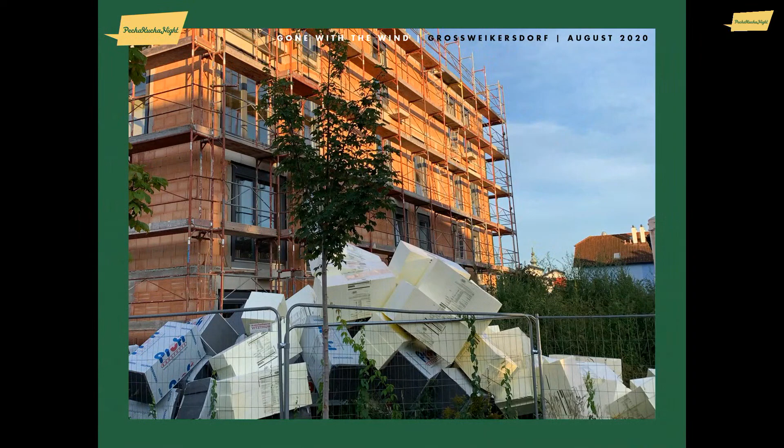But on the other hand, we fell in love with bricks, because bricks are not only a fantastic material, but they have this sensual quality. And therefore we tried to develop buildings like the Oberrad project here in Frankfurt, where we use bricks in a monolithic construction, filled with insulation, so that we don't have to add insulation to the outside walls.

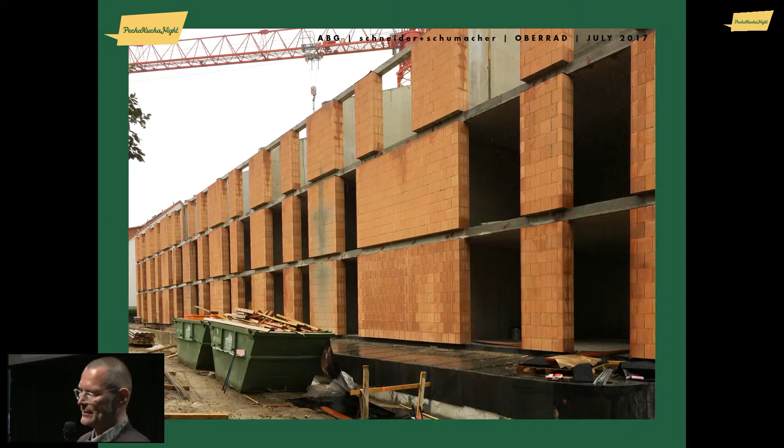The Oberrad project was developed for limited rent at 10 euros per square meter. It was not a monolithic brick construction in the beginning, because you see concrete slabs, and we also have partition walls in concrete. But we started to build facades in the brick module with perlite-filled bricks.

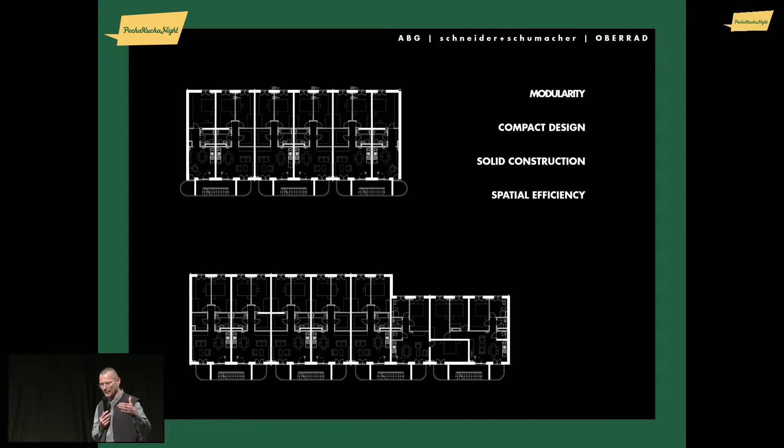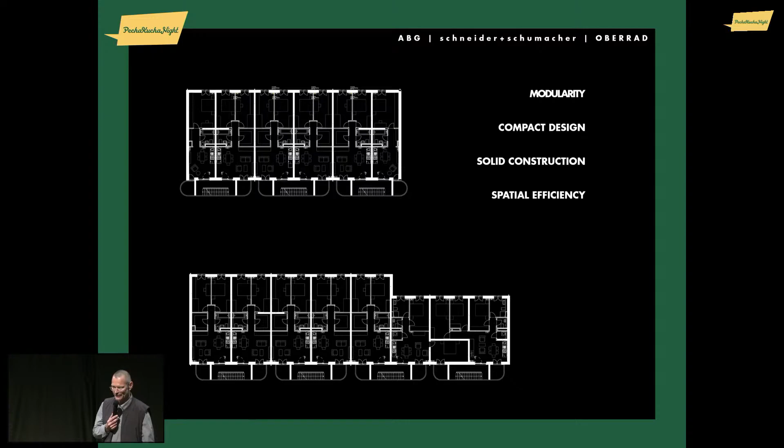What you can see here is, as I mentioned, the staircases are put outside the heated building envelope. So we have less heating energy needed for the inside, and we can save this space for the flat typology, which is a modular typology we also developed further for our next project.

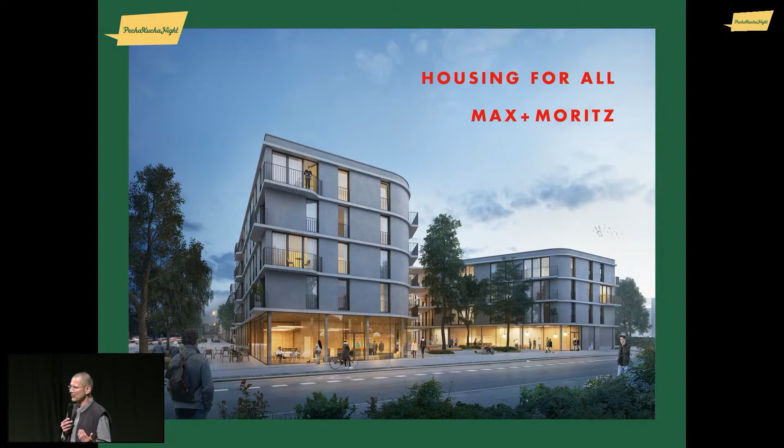This project, called Max and Moritz, after Wilhelm Busch, by Schneider and Schumacher, was entered in the Housing for All competition, where after the first phase, where we applied with the Viennese project, we were given a site at Hilgenfeld, close to Frankfurter Berg, where you can see the Nidda, and where the circle is, there is our site. A kind of bigger extension of an existing structure, and the 10 teams selected in the competition for phase 2 got 4 plots, and we took 2 of them.

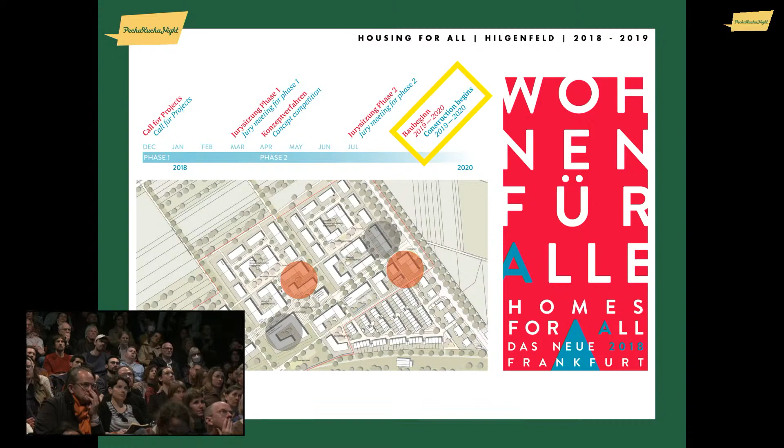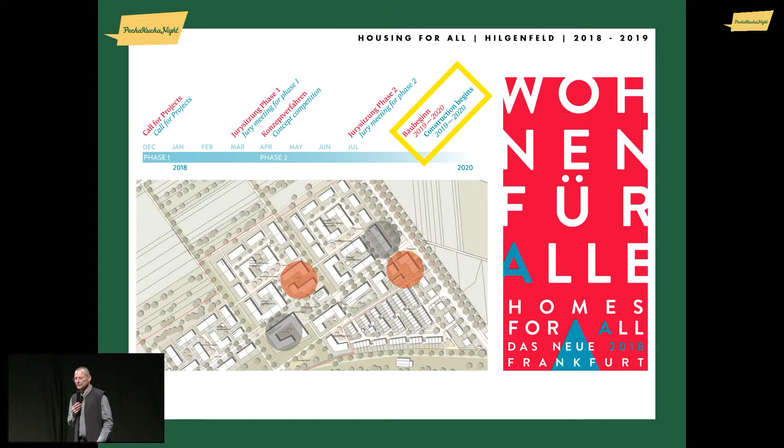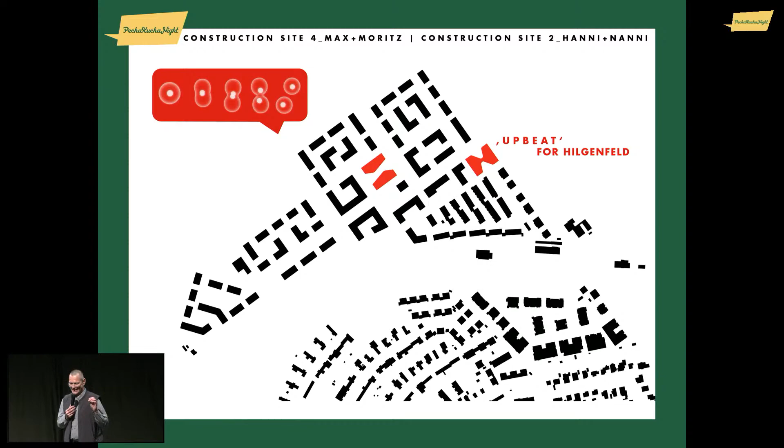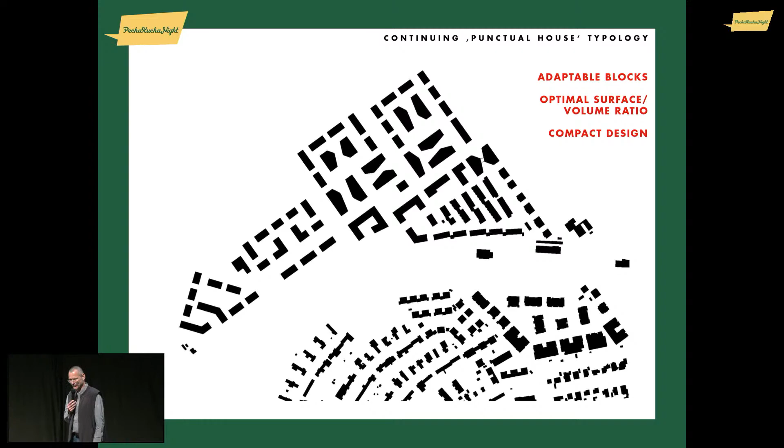As you can see, we were kind of interested in cell division - you see Max and Moritz on the right and Hanni and Nanni on the left. We also found that there are many urban structures in Germany which are only bars, and we fell in love with butterflies. So we thought we could also transform these city structures to get a bit more interesting inside spaces.

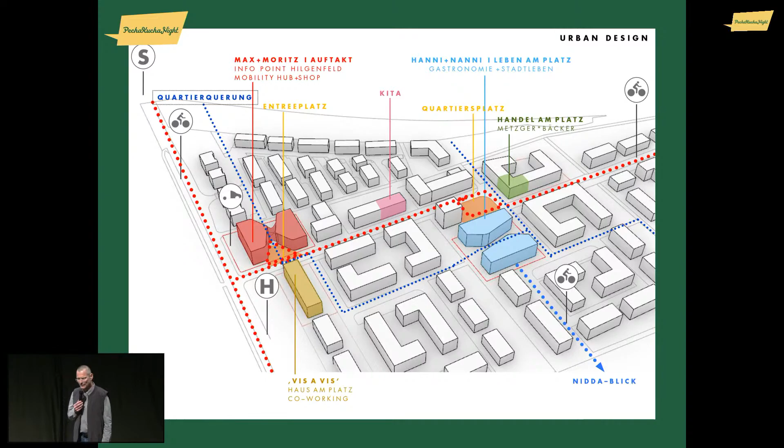As you can see here, the urban design of Hilgenfeld, on the left-hand side, Max and Moritz as the upbeat, and then entering the whole city quarter, and developing the scheme in blue, Hanni and Nanni, which was not selected.

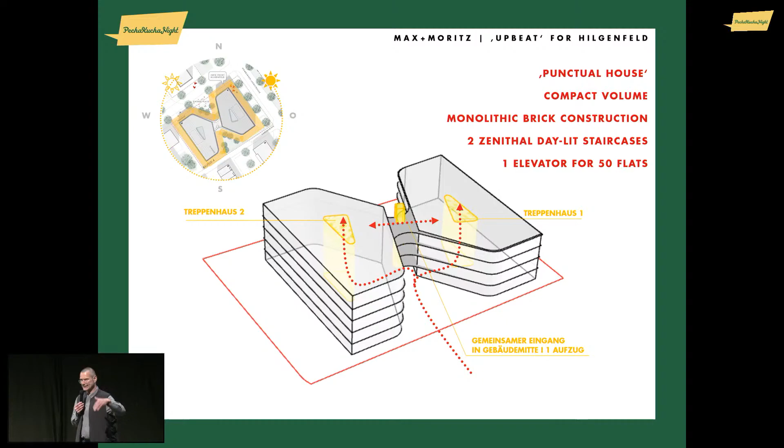But our proposal showed a kind of core or punctual house with a very compact building volume as a monolithic brick construction, as I already mentioned. We have 2 staircases which are lit from the sky, and 1 elevator in the middle, serving 50 flats.

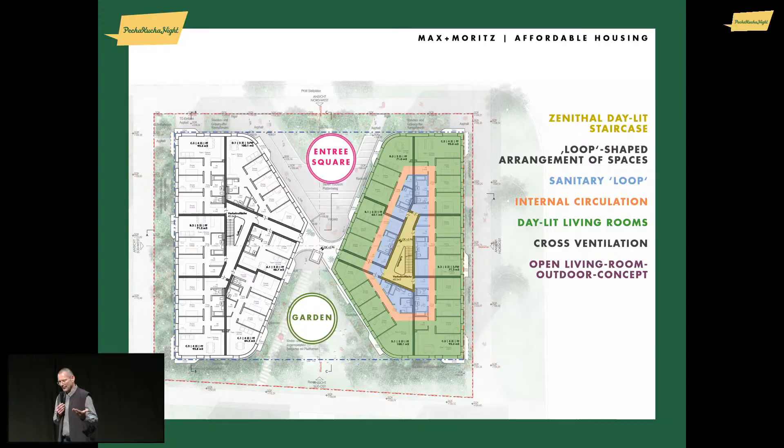This is something we often do, we try to get as many apartments as possible to a lift, and we kind of overcome this regulation.

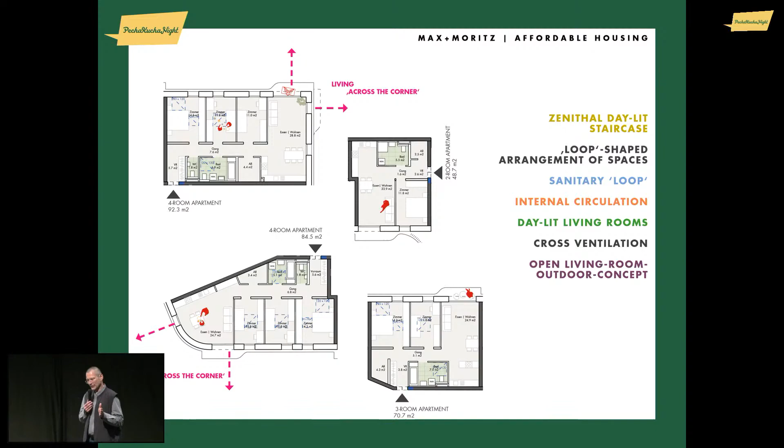That only 4 flats per staircase are enough. You can see the building structure, which is circular, and we have very compact flats, so you see the outside brick walls. 2/3 of the flats are orientated to corners or opened around corners, so cross ventilation is possible. And it's a very rigid module, in order also to save building costs.

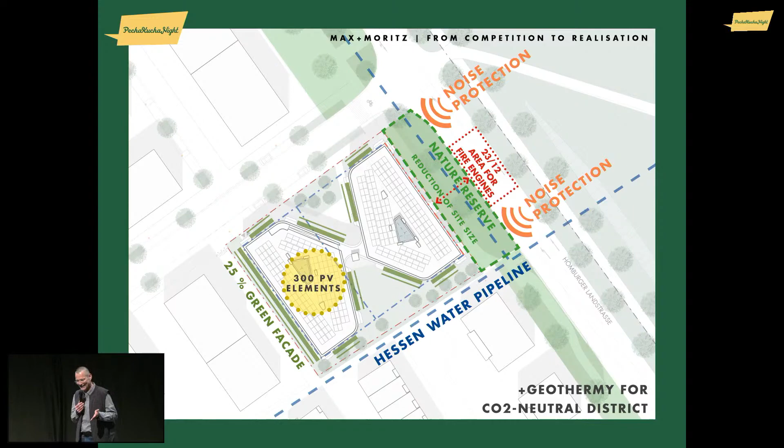Then we went into the process from the competition to realization, where the building got the Eierlegende Wollmilchsau treatment. We had to house 300 photovoltaic elements, we had to do 25% green facade. We found that the site was limited by Hessen Water and the natural reserve area, and we are still fighting with regulations dealing with noise protection.

It may be a good idea to reduce the speed limits at this road in order to get rid of this noise problem. Maybe this will be a way in the future.

It's almost 4 years ago since we won. Ernst May did 12,000 flats in 5 years, and we hope that we can build 50 flats in 12 years - it's a joke, but there is hope. We will enter the building application maybe next April, so 5 years after we won the competition.

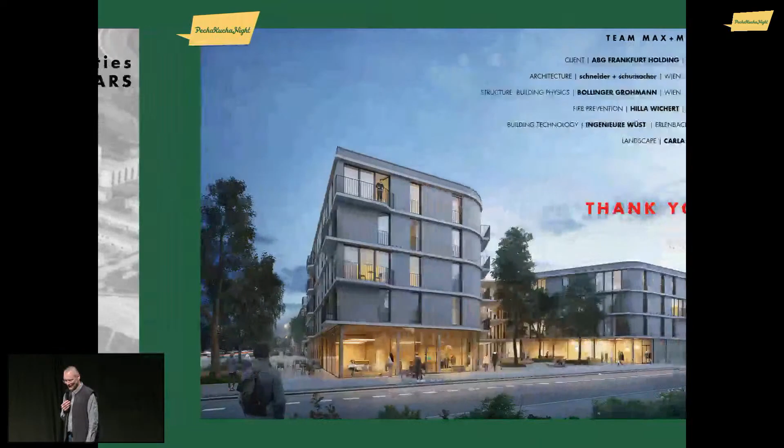I want to thank you for your attention. This is our lovely team, consisting of Bollinger and Grohmann, Hilla Wichert, Wüst Engineers, and Carla Loh for the landscape. Thank you.

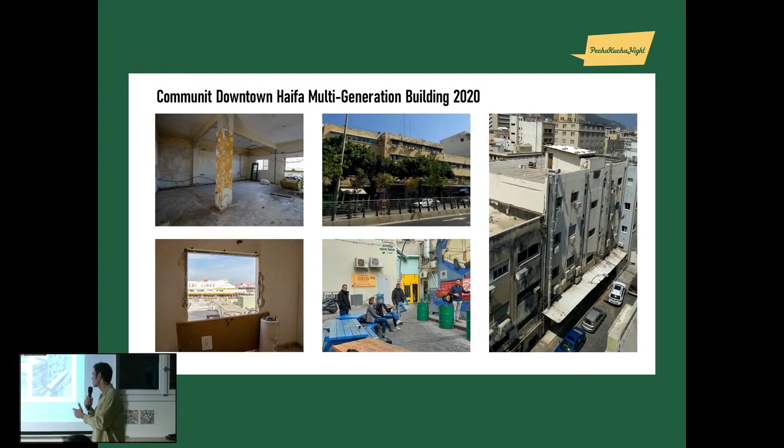We already knew the DNA, we know how to do it. We work together with our neighbors, with our future tenants, and what we're doing there is a multi-generational building, combining both young and old tenants, integrated with common spaces and areas.

This building is being built these days in downtown Haifa, going up the Carmel mountain, in Hadar Carmel. The Hadarim Fund, a social impact fund, is renovating 4 buildings in the neighborhood.

They're using the SDG, the UN measurement index for sustainable development, and creating a multi-sectoral combination to create safer streets, affordable housing, and promoting social businesses to improve security there.

Again, to the next level, we are now involved in dozens of neighborhoods around Israel. In all of those neighborhoods, we are part of the urban team as social urbanists. We combine big data with social work in order to make more neighborhoods more affordable.

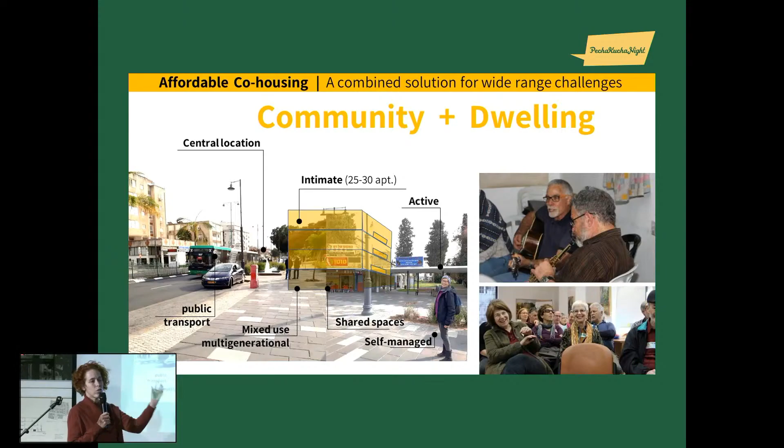So what we've been starting to look into are models that are very similar to what Shai and Eitan just showed us, that connect dwelling and community. In that way, we're trying to give our elders solutions for many of their problems.

And what we can see is the big benefits of these kinds of co-housing initiatives, where they have shared spaces and equipment, where we have a lot of social interaction at home. Just think about these people that at 65 or 70 stop working, and suddenly, after being always surrounded by people, they're not. So we want them to be surrounded by people at home.

Why is it not happening in Israel? Because the land is very expensive, and also, even though we are the land of the kibbutzim, the model of social housing was abandoned, and we're almost entirely market rate and market initiated.

And if that's not enough, it's a very big challenge, a planning challenge, not only an economical challenge, but also a planning challenge to connect community and housing together. These are processes that work at different paces, different disciplines, and how do we make these things connect?

So we started to create a strategic plan for this, trying to think of how to overcome all the challenges. And we decided to start gradually from the easier side, which is market rate, working with developers on how to create housing that has these community spaces.

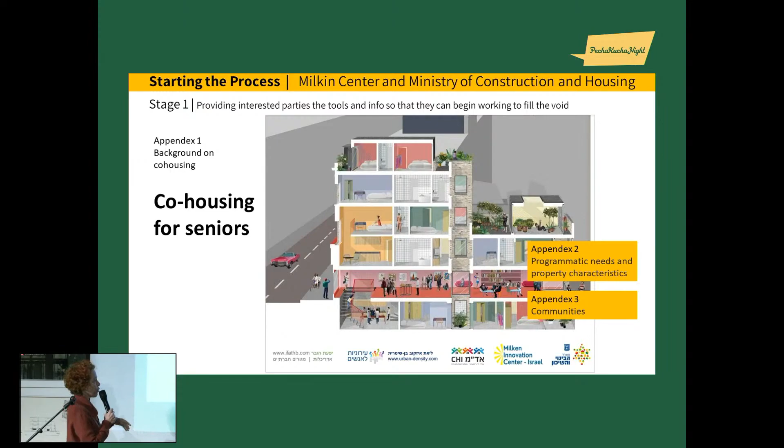With the Ministry of Construction and Housing and the Milken Center, just before Passover, a couple of weeks ago, we put out a request for sites that could house this. It was sent out to developers and to municipalities, and we outlined to them what this kind of housing is, because it's a new phenomenon here. Very few people do it, and the key to it is the shared spaces.

So we have explanations of what it is that we're requiring, and we're inviting developers and municipalities to suggest appropriate sites, where the key is actually thinking about what we can take out of our private house and share together with the community, in order to be more efficient, but also to create social engagement. Just by going to do your laundry, you have to step out of your house. Maybe on the ground floor you'll meet your neighbors, and that'll create the kind of social interaction we're looking for.

The unique requirements for our elderly are very interesting. When we look at the common rooms, we're looking at accessibility, because as they age they need, for instance, bathrooms very close by, and they need to be accessible. We're also looking for rooms that can be used for multi-generational social interaction.

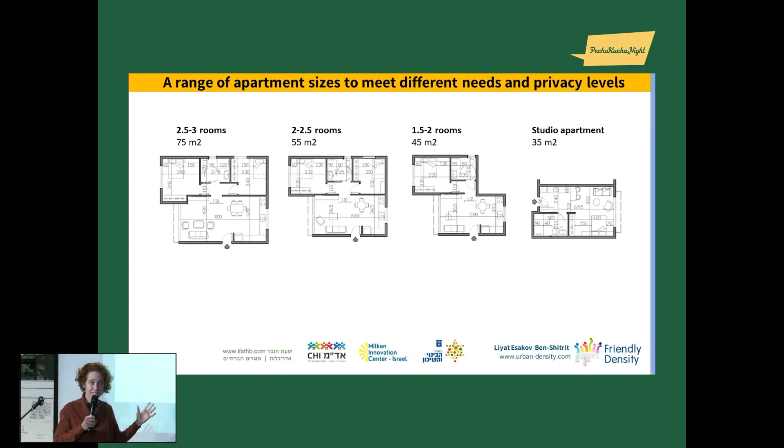We're also looking for various, very different apartment sizes. Unlike young people, older people have a history. They have families - in Israel we have big families, and we like to host them. So we're looking at different apartment sizes. We're also looking at tenure security - a person who moves into a home at age 65 or 70 definitely is not going to want to be kicked out at the age of 80 or 90. And we're looking for active kitchens, because, like I said, we like to host.

That's it. This was a challenge to speak so quickly. Thank you very much.

Thank you very much for this excellent reminder that we need different housing for different needs, and that we really need to develop further our requirements and regulations so that this kind of housing, which was just introduced to us, is easier to realize at an affordable price. Thank you for that.

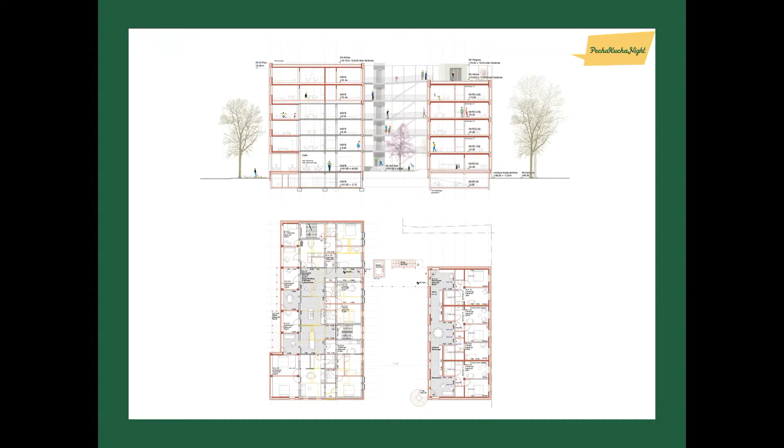We are a group of about 100 people, and we also work on this existing building and try to save as much as we can, but we also have to reconstruct one part to max out the amount of residents, because more residents means lower rent and also lower investment per person. So these are the kind of people, all experts in different fields, I would say, and we all share the passion to share resources and work on new ways of living together.

We work there together with mainLastenrad, because I think it's very important to even start being in the neighborhood, because we want to grow into the neighborhood instead of just being there when the building is finally finished. So we think a lot about what the people need in this block, and what we need if we all live together. There will be a wood workshop we want to offer to the public and share our knowledge, also a bicycle workshop, to interact with the neighborhood.

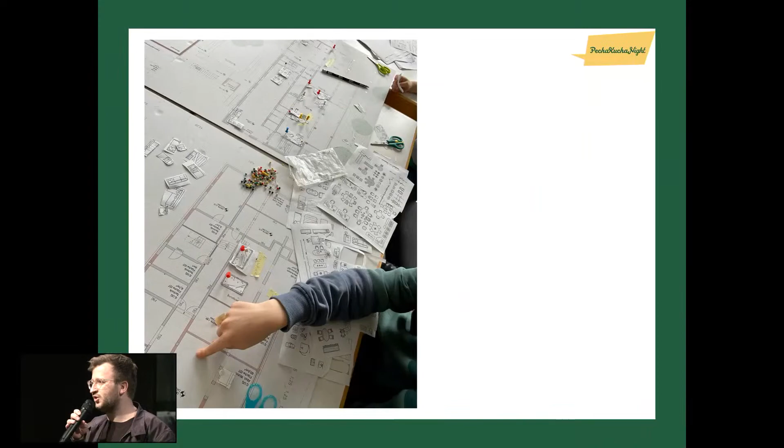We also understand ourselves as a housing lab, because we work on future affordability, and what we really want to do is work on the Frankfurter Cluster. This is an even more efficient cluster, because seeing how the prices are for building houses, we actually need to lower the total rent. That means we need more efficient floor plans, because reducing the square meter might be even more important than reducing the price per square meter.

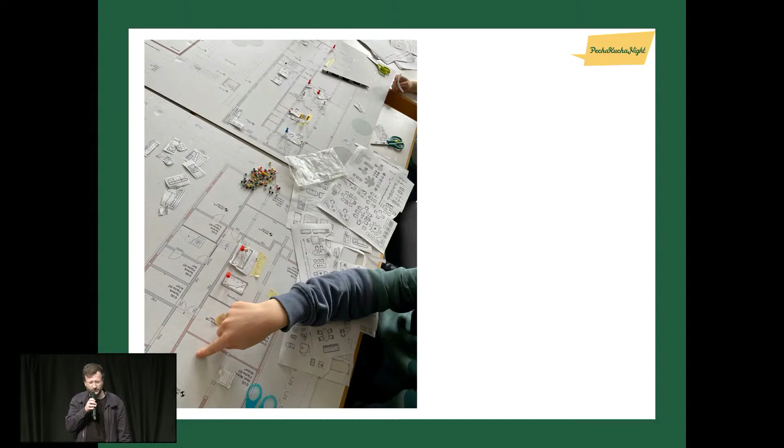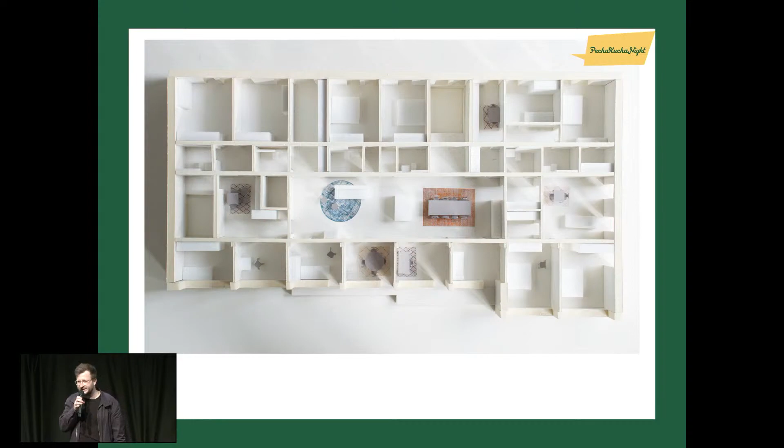I think there are already a lot of cluster housing concepts, like in south of Germany or even Austria and Vienna, and often the private apartments are still big enough so that even the community spaces are not used enough. So what we do is we try to push our limits in the private space and still have the bigger community space for this community housing project.

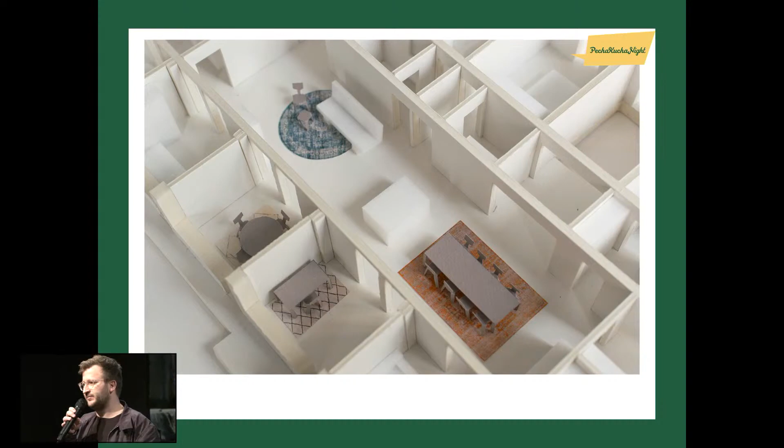And we know that someone needs to test things like that, especially if we want to rent out those flats, because there are things to organize, like how would those renting agreements look like.

I know the city of Frankfurt is already behind this change with the Baulandbeschluss, for example. They're already doing something in this direction, but right now no corporation can actually build beneath 18 euros per square meter. So we really need to lower the ground rent, the Erbpachtzins, because otherwise we stop here.

And there's also even more to do, because I think it's such a big challenge. We talk here all about affordable housing, and what we right now do is even try to build houses for our group. Especially when you think about existing buildings, it's very hard because, for example, there are things like the Liegenschaftsfonds of the county of Hesse, but they are only allowed to buy grounds and not houses. So how should we then work on affordable housing?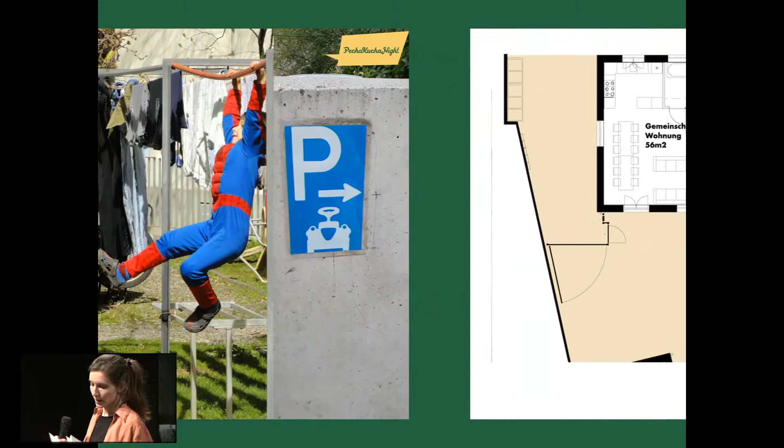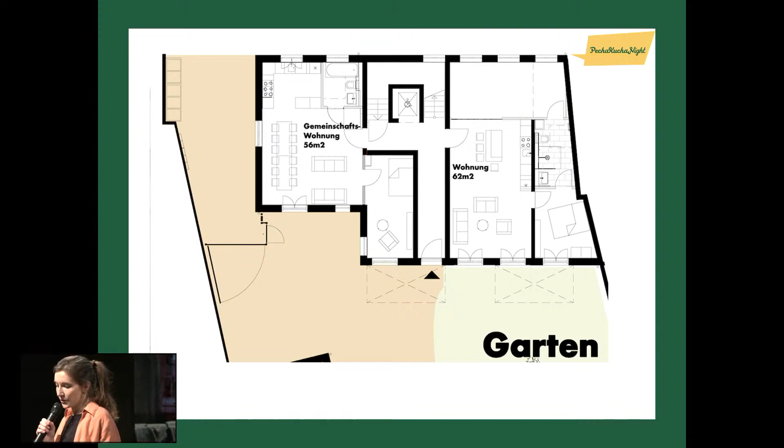So secondly, co-housing projects are often organized as cooperatives. So what is so great about cooperatives? Cooperatives secure stable rents in the long term. And with their attitude of solidarity and their democratic decisions, they offer solutions to the most diverse challenges of our time.

Space and therefore money can also be saved by sharing washing machines in a communal laundry room. 100 years ago, this was very common, at least among women. So co-housing projects brought back this beautiful old tradition, but with two differences: they are also used by men, and they call it something more elegant, laundrette, for example.

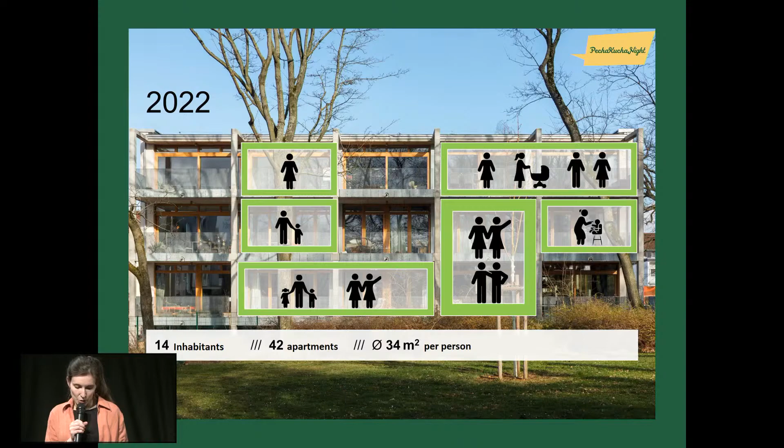And it's built to adapt to the change in their residential biographies. In 2038, their kids might have moved out, so the flats can be separated due to the modular construction. And the residents can stay in their familiar surroundings, and their space consumption is still kept very low.

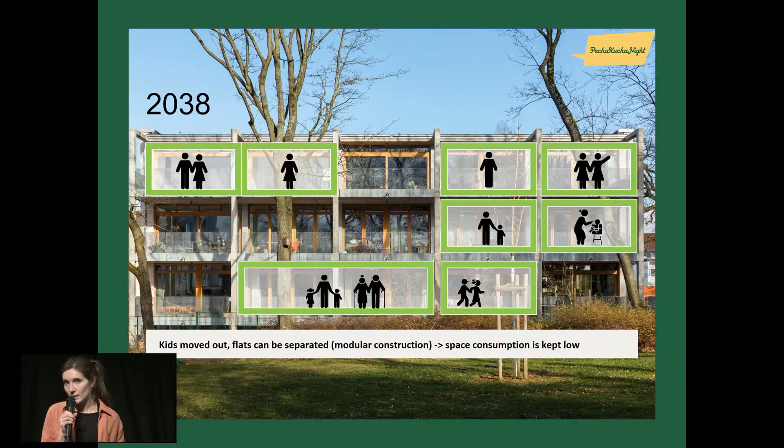I will slowly come to an end and share with you our vision. Firstly, we need more participation processes and multiple actors in housing, involving the society. Secondly, instruments such as concept awarding procedures in land allocation must become standard, rather than maximum price competitions.

Our team and many more people in Frankfurt and across Germany are working on that vision. We see ourselves as an intermediary organization between civic initiatives, politics, administration, and the housing industry. We invite you to visit the projects in Frankfurt on the 13th of May.

Thank you, Tabea. It was very inspiring. Now I would like to invite another Israeli speaker. Architect Daniel Zarhy graduated with honors from the Tel Aviv University School of Architecture. He has worked with OMA Rem Koolhaas in Rotterdam and Herzog & de Meuron in Basel. Zarhy has also been teaching at Bezalel Academy of Art and Design and Architecture in Jerusalem since 2012. He's going to speak on the design of two new communal housing projects currently planned in Israel. The architect will focus on the subject of empty spaces in his design and on the point of civic bottom-up engagement. So Studio PEZ is your office, and you're going to speak about communal housing projects in Israel. Daniel, please.

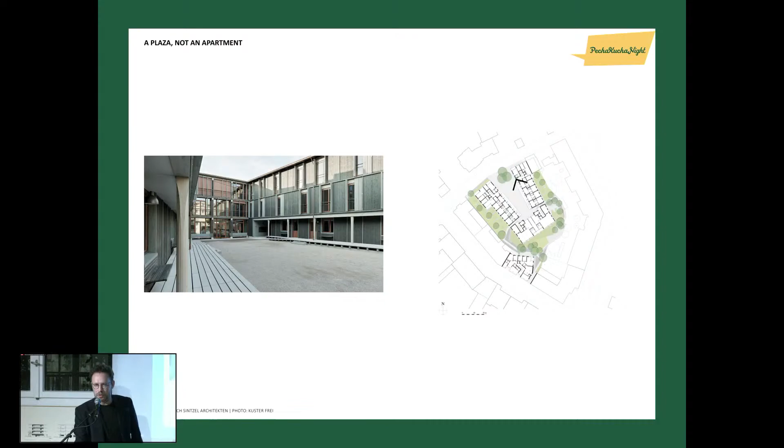Little did I know that at the same time in Basel, Switzerland, my business partner Pedro told his wife, his Spanish Cariña, vamos, and they had a similar opportunity in Basel when this nice Sintzel project just opened for public housing. Actually in both places, it wasn't only about the apartment, but it was more about the public space in the project, either the garden or this public space.

So when we speak about affordable housing, we usually miss the point. Why? Because we tend to speak about the minimum requirements for a flat, the minimum requirements for a room, the minimum rent. But we also should talk not about housing, but maybe we should talk about homes. So affordable housing is not only about real estate, not about square meters, or even how sustainable they are - all very important - but actually, they should include all of them, but much more.

So we believe that it's not only about reinventing the wheel, but rather rethinking each of the basic ingredients that construct a home. And I will demonstrate it in two projects in Israel and two projects in Basel, actually in Switzerland.

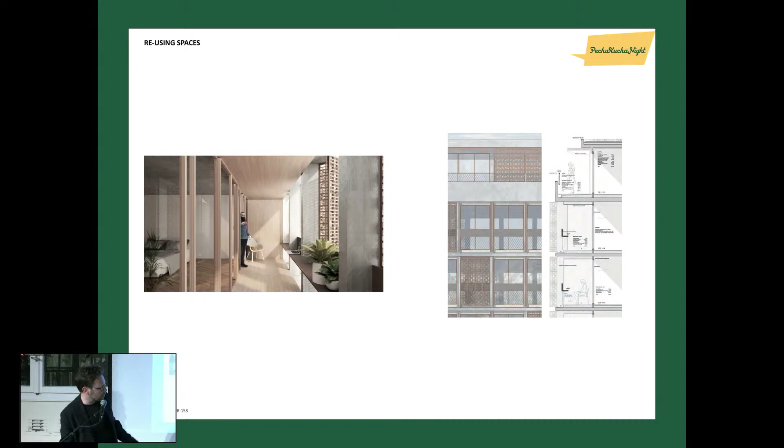So this is Hochbergerstraße in Basel. The project is about reuse of an existing office building in an industrial part of the city and turning it into affordable housing - the most sustainable way ever to reuse a building. And we looked for ways to use these steps to create new spaces, like open spaces for communication, for air, for meeting places.

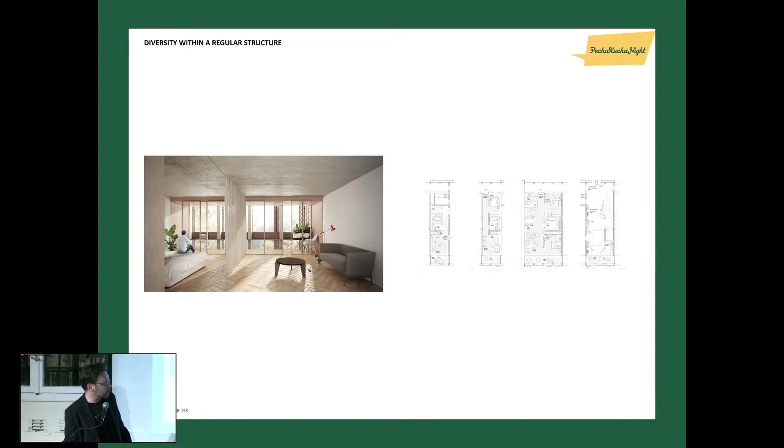As an office building, it has a regular structural grid, but we thought that encounters between people should have a diversity of apartments. So we created a variety of apartments that are able to host a variety of tenants. After inviting everyone in, we needed to design something extra - a social space on the building rooftop, so everybody could meet there, work together or alone, relax or work, flexible enough to choose your own activity. So we provide as architects a platform, and the people provide the content.

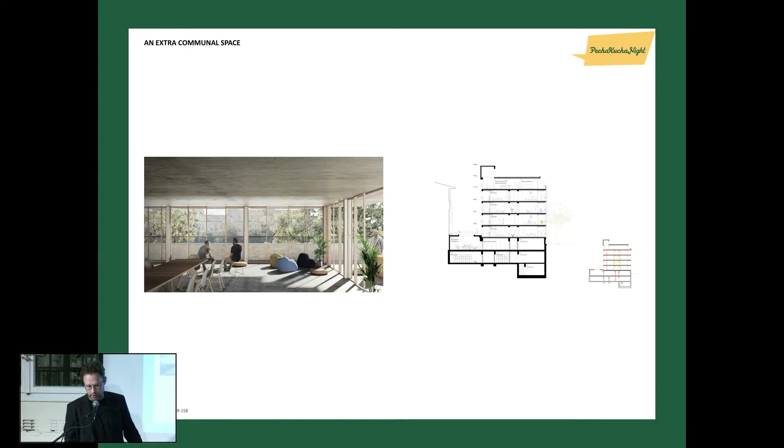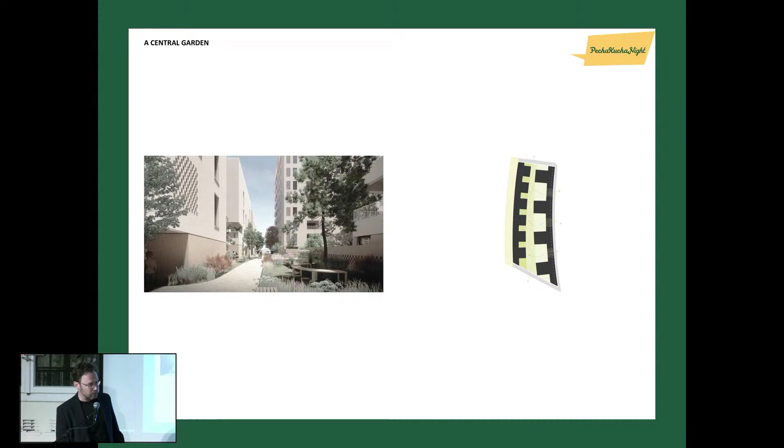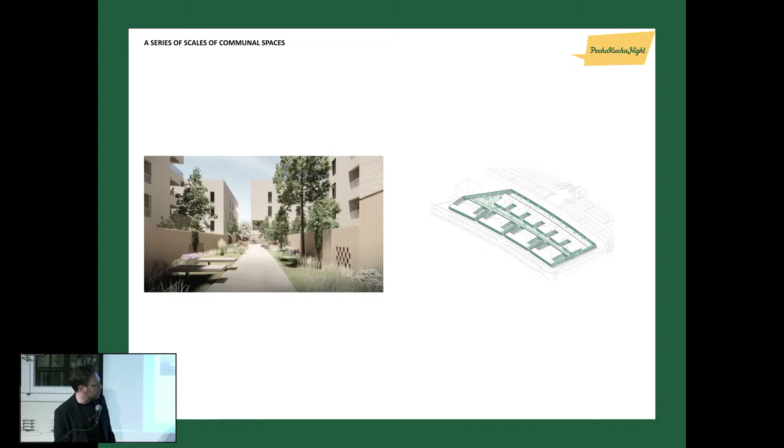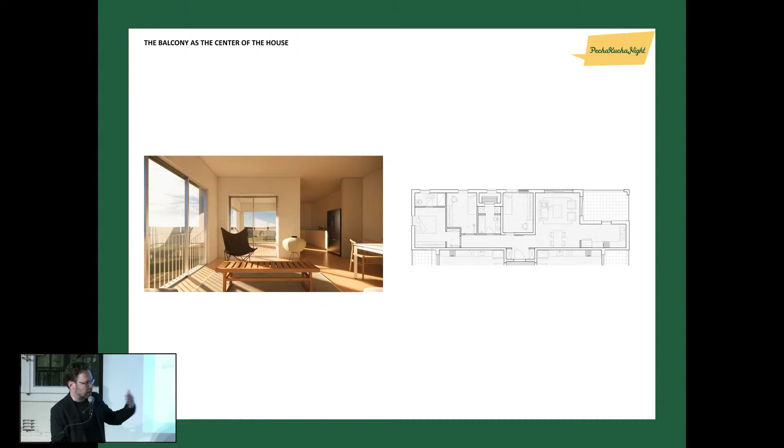As you know, we provide the scenery, but it's up to the people to provide the activities, the games, and the meeting places. So the next point, which might sound banal, is that by rethinking the balcony as a bite in the building's volume, it becomes the center of the house, a kind of Mediterranean patio that becomes the meeting place, a dining place, a living space for the family, where you can go from the kitchen or the living room, and where the whole family could meet.

We're going back to Switzerland, this time again in Basel. I like this project because it's actually intended for the least privileged people, for refugees. We wanted the tenants to be proud of their home, to feel that they are living in a luxurious palace. And the answer sometimes is very simple.

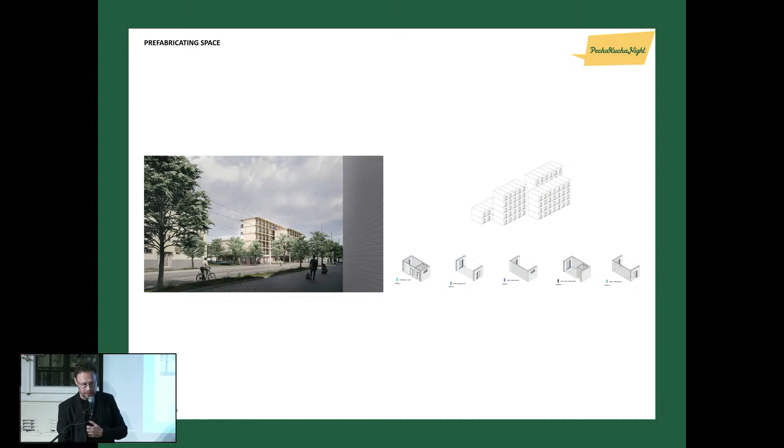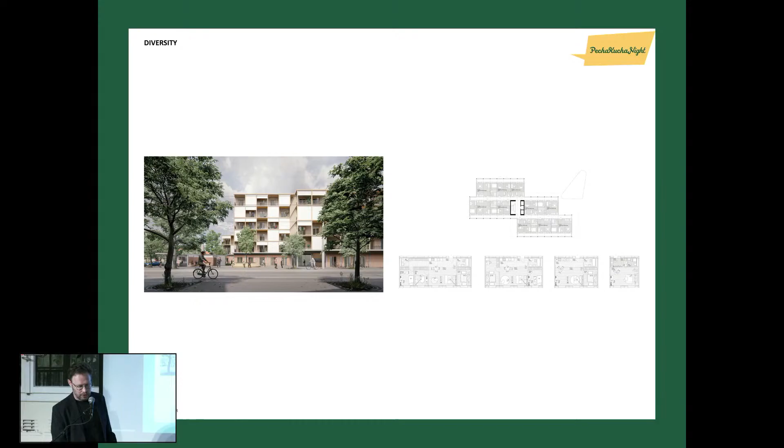So we used prefabricated timber construction that creates this kind of special silhouette. We stack the modules in a way that reacts both to the street, to the neighborhood, and also to the small cafe pavilion in an ex-tram station that was nearby. And despite this modular character of the building, we wanted to create...

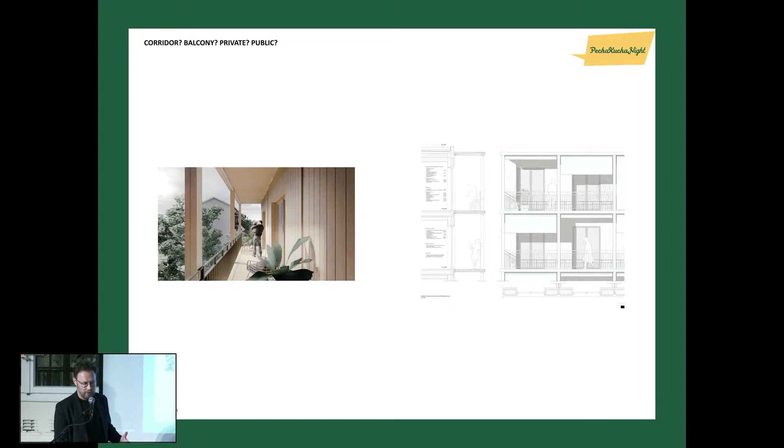The need for efficiency led us to create a kind of dual use for each of the spaces. So the access galleries for the apartments become a meeting place, they become a balcony, because every square meter counts, to make it as affordable as possible and to maximize the utility. We call it the Maxim house, which actually also means a charming house in Hebrew.

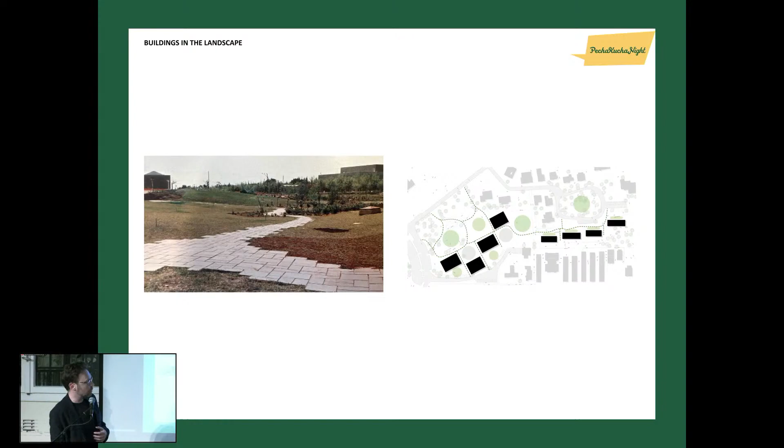Back to the Holy Land, it's a project we're designing. It's not so affordable actually, but in the Weizmann Institute of Science, where there is a striking landscape design from the 50s and 60s by Zur and Yahalom. We wanted to ask ourselves, how can we create a housing scheme that welcomes the landscape in, even in the apartments?

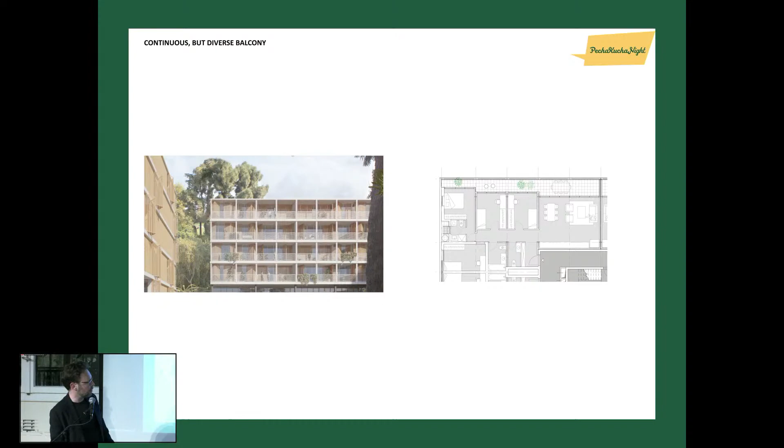So what we did is we created, each apartment is based on an elongated balcony with varying widths, each one according to the adjacent program, to the living space and eating space, to the rooms where you can have a cup of coffee overlooking the landscape, and also just to stand outside, catch a breath of fresh air, and look over the landscape.

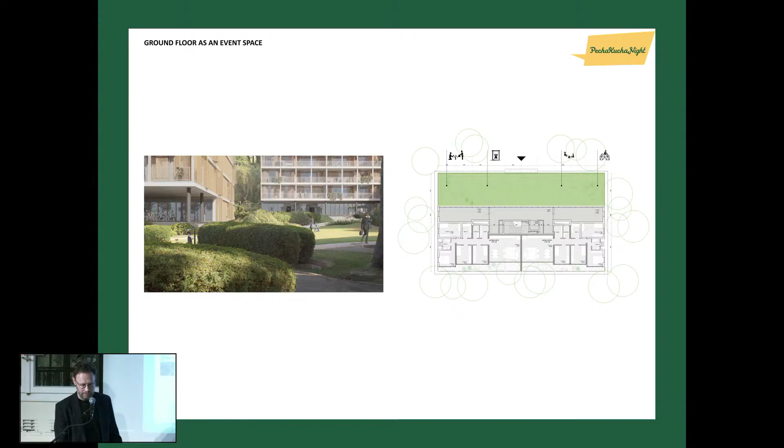But the main thing, again, is the community. By liberating the ground floor and leaving it half empty, we invite the community and the landscape in. It's a place where people can grow their vegetables, children can play, or scientists can talk about quantum physics or something like that. So how can we use architecture to take all those small ingredients, courtyard, balcony, bench, gravel, and create a wholesome building that is greater than the sum of its parts?

So we believe in architecture that is generous and open, a design that leaves room for interpretation. In other words, this is what defines an affordable home from a house: a room, both physical and metaphorical, for everyone to interpret in their own way. Thank you very much.

Daniel, thank you so much. It was exciting to hear that what we can do with such a simple idea of open space and height differences, and look at it from this scope, is really exciting.

So now I'm really honored to invite the last speaker from Israel, architect Omri Levy. I'm also very excited because Andrea and us here at the Living House and Ernst May Gesellschaft always thought that we want to make this event very multidisciplinary, not only hearing about a certain angle of the subject. Now we have the honor to hear students speaking through Omri Levy. He teaches in the Bezalel housing semester as part of the architectural education, focused on domestic spheres, promoting relevant debates on housing issues of equity, justice, climate change, existing culture, and possible alternatives. The research was done with students in the housing lab of the School of Architecture at the Bezalel Academy, looking for alternative ways to dwell in the near future, focusing on the challenges of density, climate change, loneliness, and urban responsibility. So I'm very excited to hear your voice now, Omri, and see you later.

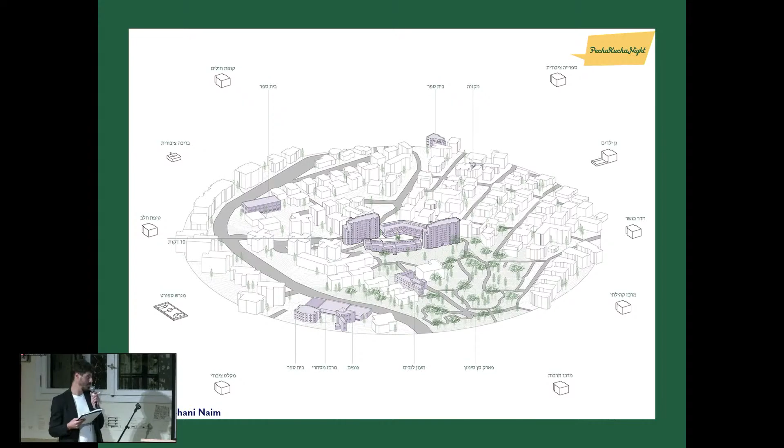The San Simon neighborhood is a domestic neighborhood, and we very quickly realized that it lacks a lot of amenities. There are a lot of units, but not so many functions that can help.

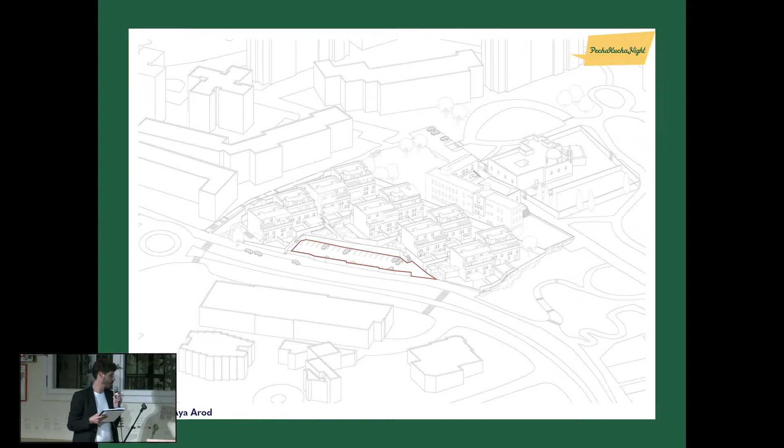It's very hard to see the lines, but practically, we assessed the site and tried to realize what are the qualities of different areas on site to understand where we can best intervene.

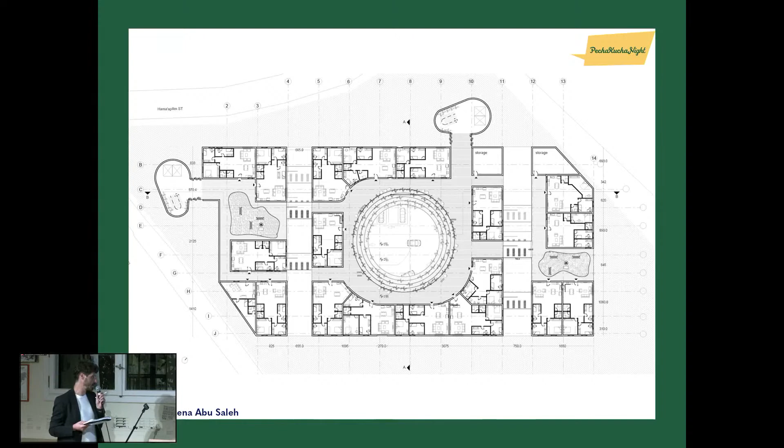I would like to quote Daniel Burnham and say that maybe we realize that we should make big plans, or at least we shouldn't be afraid of big plans. Big plans are great ways to reduce cost and to share facilities together.

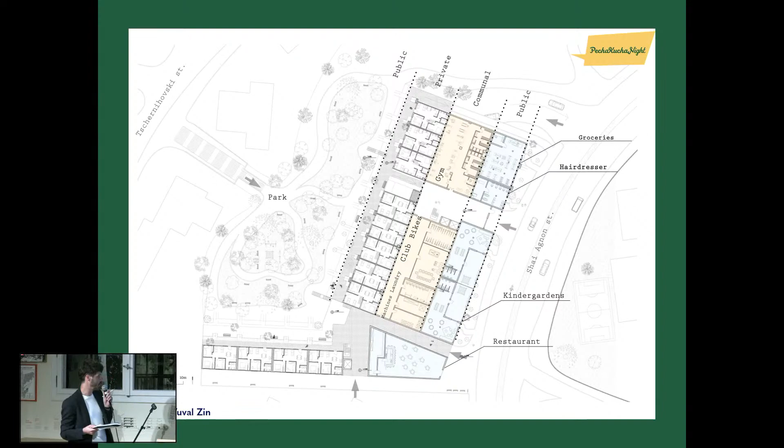We realize that we need to communicate with the city and use our plans to basically give something to the city, but also ask the city to give us something back. As you can see in this plan, there's a gradual shift from the public to the private through the communal.

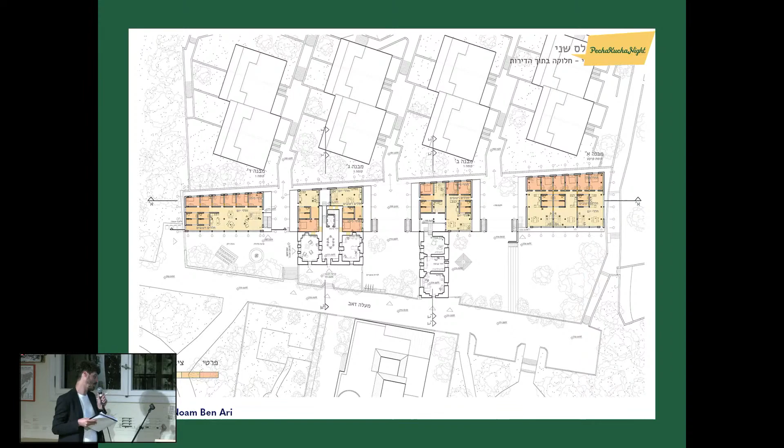We realized, as many have already said, that we need diversity, not only in the housing apartments, but also if we plan a big complex, we need different kinds of buildings together. This diversity is also within the different buildings, from private to public.

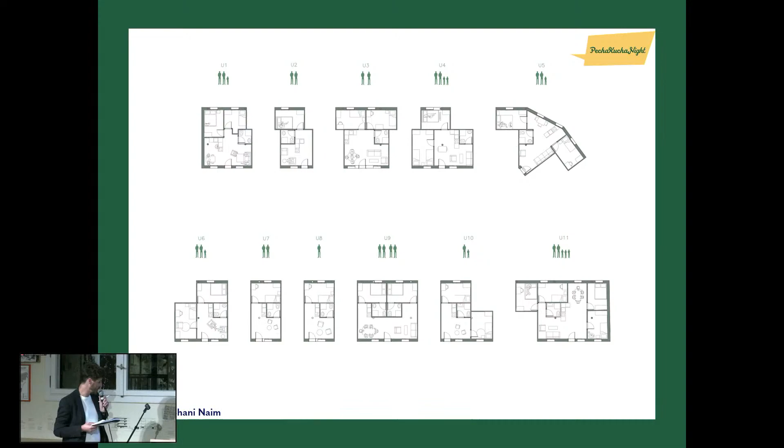As many have already said, society is shifting. We do get many different people, and we would like to plan many different apartments that can fit the different needs of our people, and that's a great idea from Shani.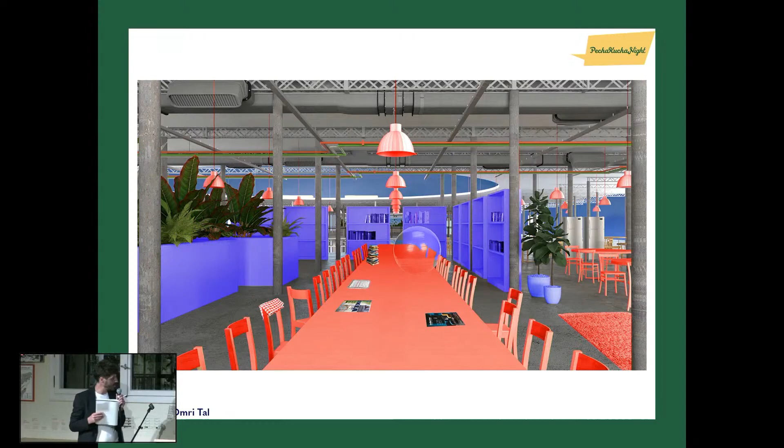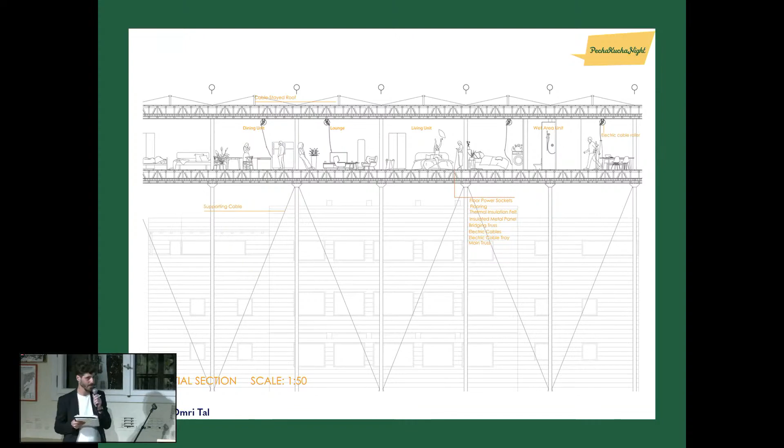We realize that's kind of a shift in architecture, where the architect does not focus anymore on the space itself, but rather on the infrastructure. In order for that to happen, we need to have electricity, water, and drainage for the people to share.

Of course, that's very radical, and we would not live in that right now, but we did understand that we need to plan for flexibility.

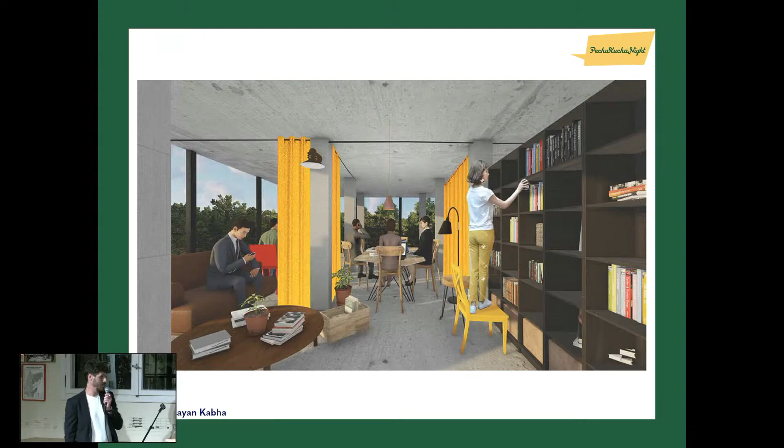So planning for flexibility is important, and in that sense, we can think of spaces that maybe will be used in one way for one use and in another way for another use.

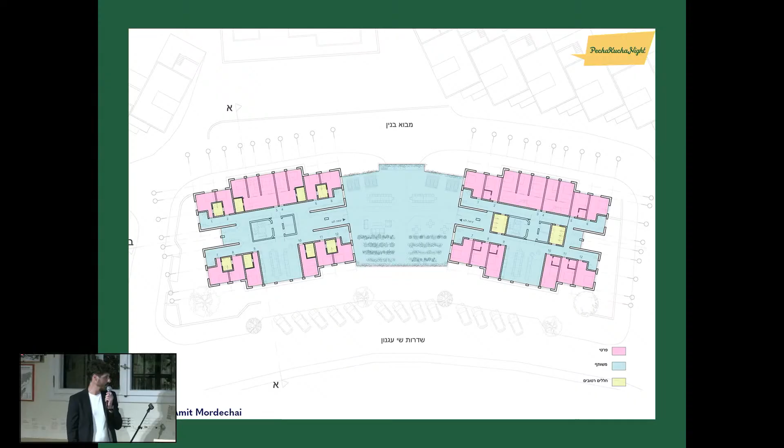Now, our most radical proposal was a proposal to not extend at all. In this proposal by Amit, he proposed to take buildings with 4 apartments per floor and redivide them internally into 12 units. In another proposal by Shira, she proposed to have 1 triplex apartment and divide it into 3 duplex apartments.

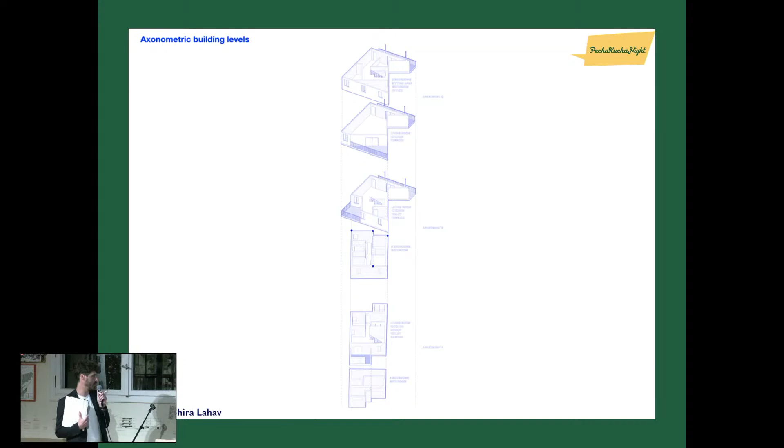Now, this might seem radical, but if we think that we're going to get more and more dense, we might need such a solution as forced division, or maybe compensation for people that have too much space.

But in any case, we understand that we need to invest, as has been said already, in the communal space, because the denser we live, the more important the communal space is, and we need bigger communal spaces that can help us make smaller housing units.

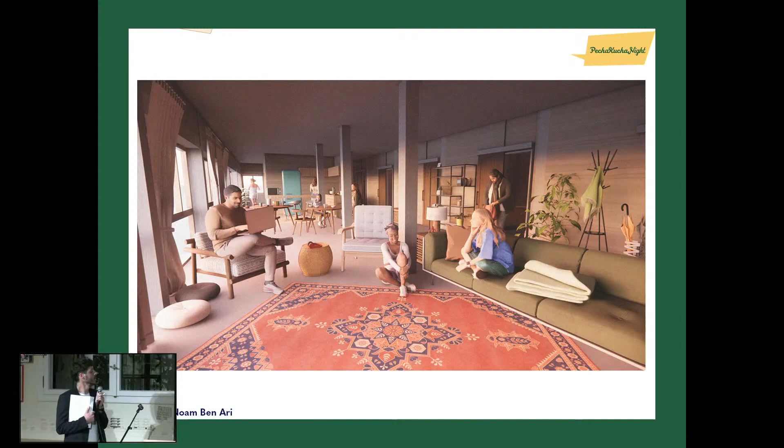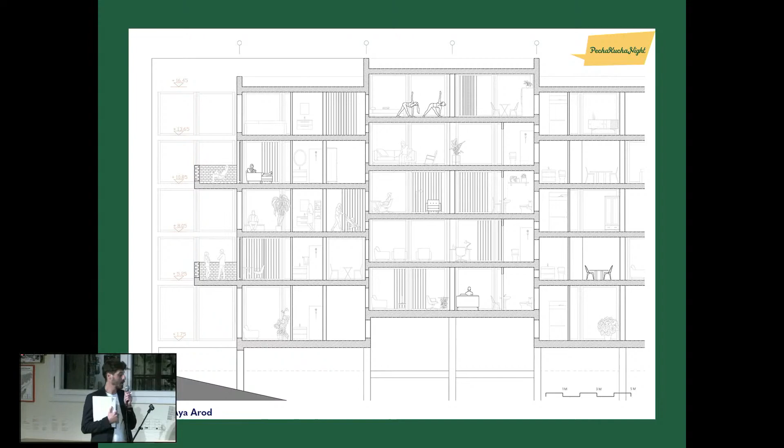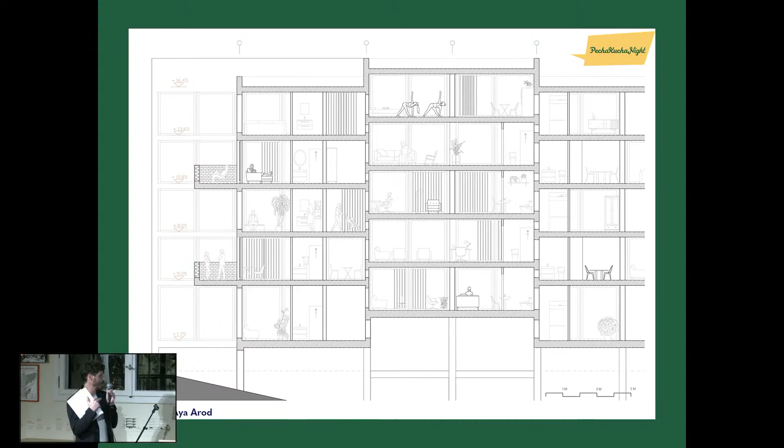So one thing that we realized is that architecture is really important. With all due respect to all the numbers, architecture can allow us, through different manipulations, to live closer at a higher level of privacy and quality. And here, Aya has made a small shift in the height, which allows people to have bigger privacy.

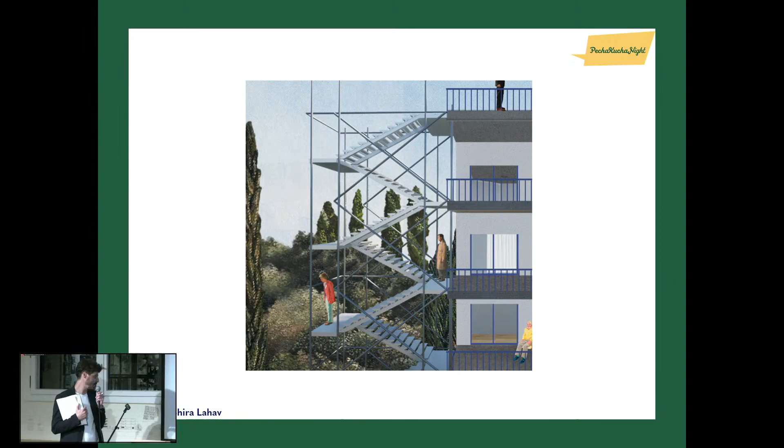Or we can rethink materials that we use. For example, if we stop using unnecessary materials and use temporary materials, maybe we can reduce the cost and the effort in the building site. Of course, that's very theoretical, but maybe it's our responsibility as local architects to rethink the materials we use.

We also need to think about where we integrate nature. And it's hard to see, but inside the building, Tamar was very interested to integrate nature as we get denser and denser.

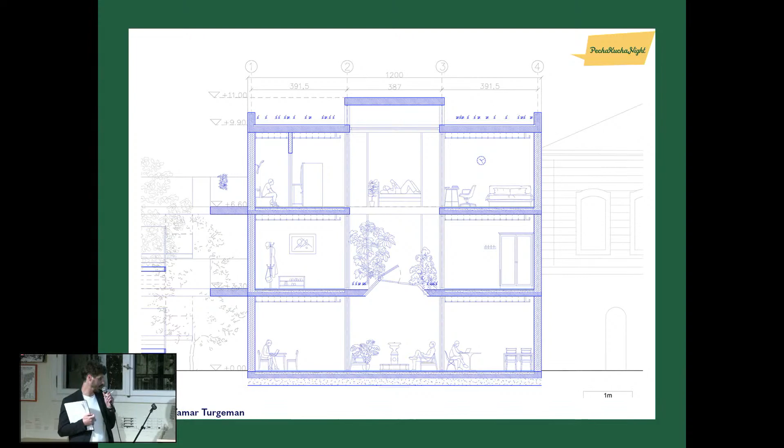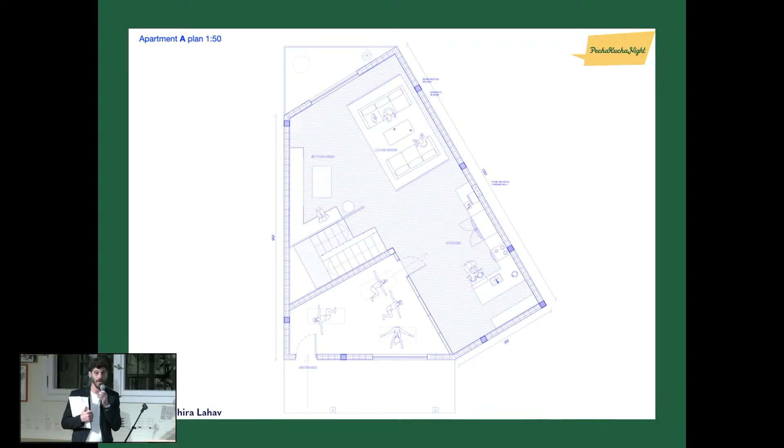So another thing that we might want to do, and I apologize that it's hard to see, is think of productivity in the apartments. In a sense, Shira proposes to have in every apartment another room that can be used as a clinic, a yoga studio, or for any other use.

In any case, if we want to rethink living, if we want to rethink housing, what we need is great imagination, and what we need is to rethink the way we live, to rethink the story. Thank you very much.

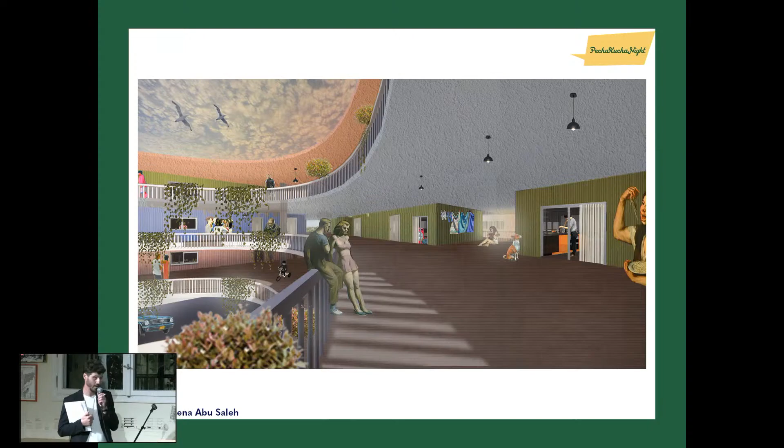Thank you very much, that was really interesting. I'm happy to get ideas from students, new ideas for housing, or maybe not so new ideas that we just need to rediscover. I think flexibility and green space, free space are the buzzwords, and they should not only be buzzwords, but should be filled with possibilities.

Back to Frankfurt. Now we have Ruth Schlögl and Nathalie Heger. They are researchers at the Frankfurt University of Applied Sciences, dealing with the large housing estates of the 1950s to 1960s in the Frankfurt Rhine-Main area. Whether dealing with the housing resources of these settlements and their resilient further development, or the issue of sustainability, they can give a professional opinion on both. Lucky us. The two have gained their knowledge at various universities and organizations in Europe, and their topic today is Cornerstone Life Quality. Welcome, Ruth and Nathalie, the floor is yours.